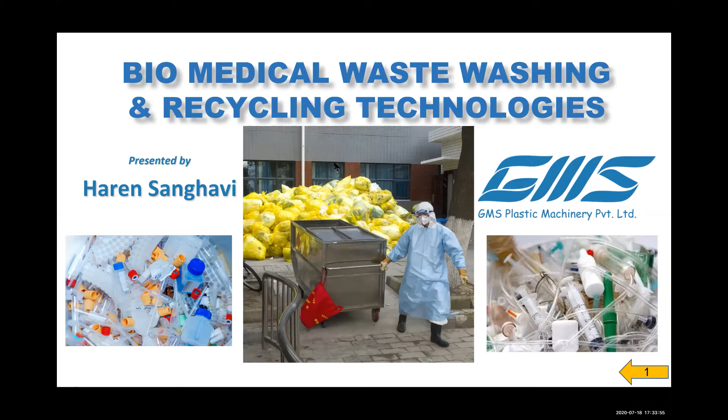And when we are handling packaging, we need to sanitize it. In spite of doing all the sanitization processes, there is some sort of contamination left behind. To handle that contamination, we need, and 100% need, to wash the waste. And to wash the waste, we need either fully automatic washing plants or semi-automatic washing plants.

Now, the requirements for the type of semi-automatic or fully automatic washing plant differ from each client and the output required by each of them. So I will stress here the major requirements, then the minor requirements can be decided once we talk to each client and understand the product they want to recycle, the output they require, etc.

The main requirement in the fully automatic washing plant would be the shredder. Then comes the friction washing, which is most important, because at this stage, after the shredder or grinder, we are able to put some detergent with water to remove all the contamination, even in the minutest of particle sizes. Subsequently, in the friction washer, with the help of friction, every corner of that plastic can be cleaned of all the contaminants left behind.

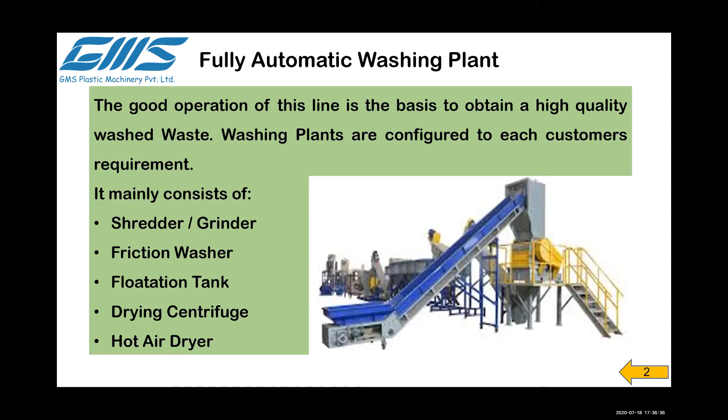After the friction washing, then comes the flotation tank where we settle all the heavy particles and the plastic will float and move further. Then we have the centrifugal dryer and then the hot air blower. This configuration is the basic configuration, but it need not be the same every time. It could vary from client to client, as I said earlier.

In the fully automatic plant, the most important thing is that every single unit is configured for very low power consumption of 0.4 kilowatt per kilo, which is the data we have received from our clients, and we are confident about it. Only one operator and one supervisor are required, depending on the size of the plant, but mostly one operator and one supervisor is enough to run the fully automatic washing plant.

Labor is required only to feed the material at the starting point, and then we have complete automation. We can even link a recycling machine directly after the washing unit so that you get the granules at the end without manual touch. So once you dump the material into the washing plant, you directly receive the granules and you are working very safely.

Floor space required would be close to around 50 feet by 20 feet, depending again on the configuration of the plant. But this is based on the previous slide that I had mentioned.

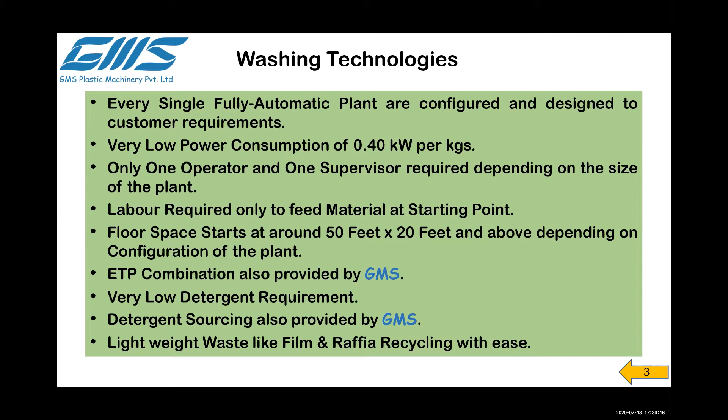Detergent sourcing can also be provided by us. Lightweight waste like film, raffia, of course, is not part of the medical industry unless it is the packaging of the product which has come in. But still, raffia and any other thing related to the medical industry can be recycled and washed easily.

Then we come to the semi-automatic washing plant. Here you can see there is only the friction washing device and the centrifugal drying device. The friction washing device has to be handled and maintained manually, so the detergent dumping and material dumping has to be done manually at every single batch, and this is a batch process.

This is not a process where you can create automation unless you add certain more equipment, which would then be ideal to shift to a fully automatic plant. In this, the requirement of labor would be a little more than in any other washing plant.

Detergent and water requirement would be close to around 10 liters per kilo in both plants, even in the fully automatic or the semi-automatic. After the centrifugal dryer, we can attach a hot air blower so that the material can be dried 100% and fed to the recycling machine fully automatically.

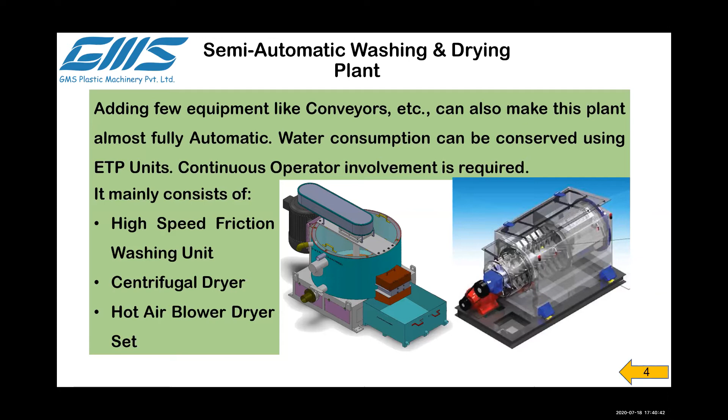In the recycling and pelletizing plant, as you've seen in my presentations earlier, we have two types of recycling plants in this application. One would be for better washed and cleaner material, where we have a single stage extruder with a force feeding device. You can see the feeding system here, then the online screen changer and then the online die face cutter.

Now here you see this equipment. This is part of a venting system where we are able to remove the moisture.

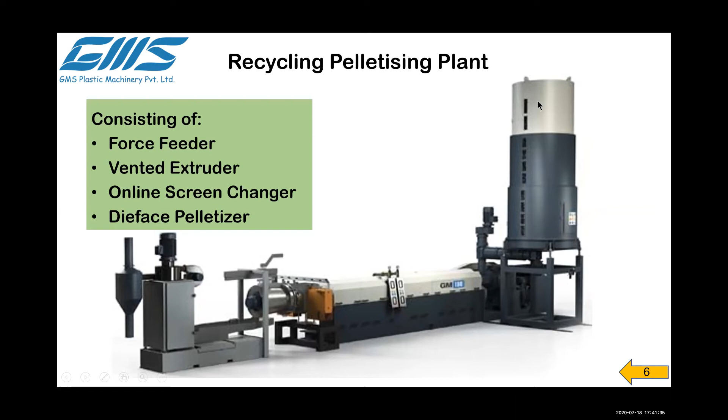After washing, we can directly bring the material here and recycle it with ease. This is a double stage extrusion unit where you should have two extruders if the washing is not done properly. After the force feeding device, you have two extruders. Both could be vented, or vented in between the two extruders, and both could have a screen changer, or either can have a screen changer depending on the dirt quantum. Then we have the die face cutter.

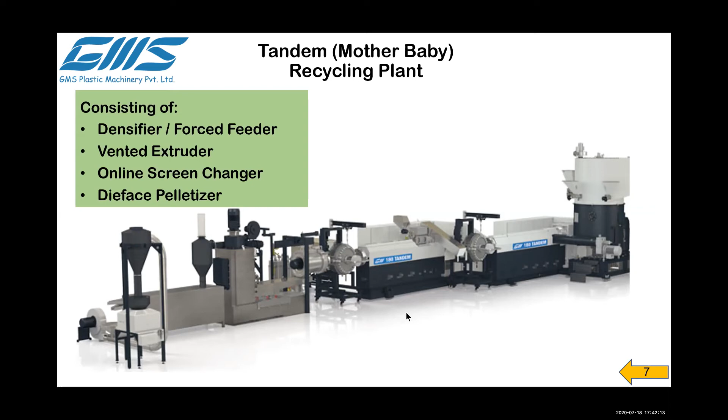Normally, in most medical applications, we would suggest a single stage extruder because they are not very dirty unless they come from dumps.

Now I'll start my presentation on engineering plastics, which is again our very big business and a very demanding business. GMS has developed specialized equipment for recycling engineering plastics, and we are proud to say we are able to recycle almost all types of engineering plastics except those in these particular types of equipment you saw in the earlier slides, except for nylon, PET and PVC.

For nylon and PET, we have a different set of equipment because, for example, in PET we require a lot of pre-drying and after-drying. For PVC, we need air phase cutting instead of water immersed die face cutting.

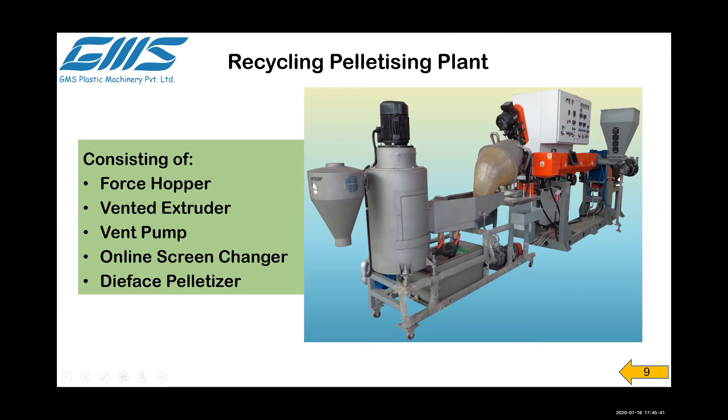The benefits of our recycling machine, the main features are low power consumption, close to around 0.25 to 0.37 kilowatt per kilo. The reason for such low power consumption is direct coupling, hence no slippage of belts, pulleys, or transmission systems. Variable speed is given to each equipment.

Consistent output, as I said earlier, the force feeding makes it consistent. No preheating of material is required. I stress this because in engineering plastics, for example polycarbonate, ABS, PC, the traditional conventional equipment would require preheating, and everyone needed to invest in high-speed mixers, whereas now the requirement of high-speed mixers with our equipment is eliminated. Hence you save a lot of investment, and over and above that, you save also on the power consumption of the high-speed mixer.

Then comes the extruder heating, which is very low, almost every zone is not more than 4 to 5 kilowatt per zone. All motors would be running not above 60% capacity. You can see the power saving at every stage. Of course, over and above this, we have certain equipment which we are also providing with PLCs and Industry 4.0.

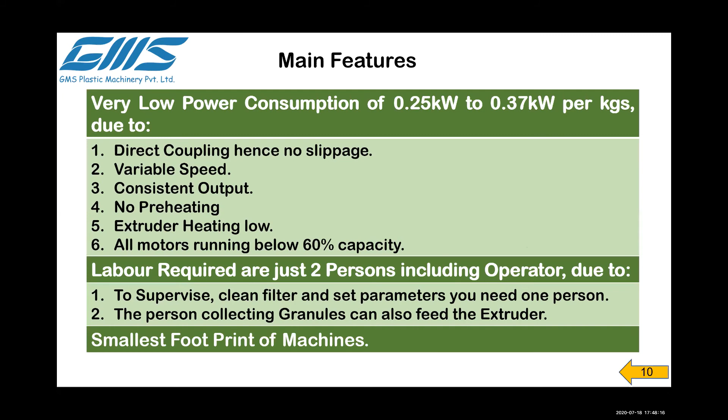The machine, as I said earlier, has the smallest footprint. Again, no mixer required, no pre-drying required, so you save power consumption. You can, without any worry, feed material with about 3% moisture into our machine, because all our machines are vented.

Post-recycling, standard dehumidifier drying would be enough to reuse the material. It will be the same time and temperature to pre-dry the virgin material.

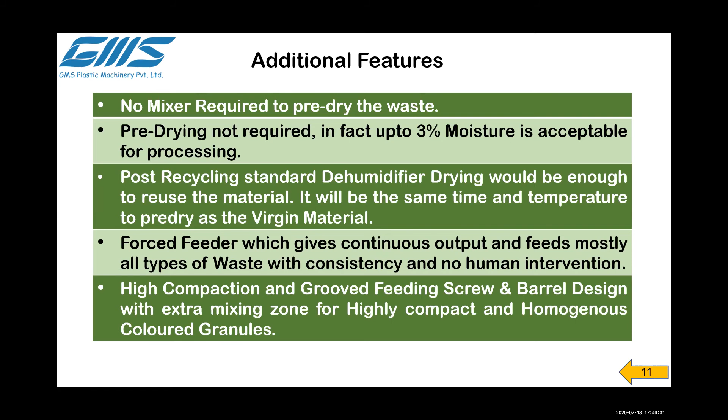Forced feeder gives continuous output and feeds mostly all types of waste with consistency and no human intervention. High compaction and grooved feeding screw and barrel design, with an extra mixing zone, give highly compact and homogeneous colored granules. So if you are just pre-mixing the material with pigments, you can do it in a tumble mixer and dump it in our machine. You don't need a high speed mixer, just a tumble mixer, and you will still get homogeneous granules from our machine.

Then, all our machines are built with a die face cutter, so you get uniform granules. We have all our machines built with oleodynamic online screen changers, so you don't need to stop the machine. This saves production time and minimizes your losses in production.

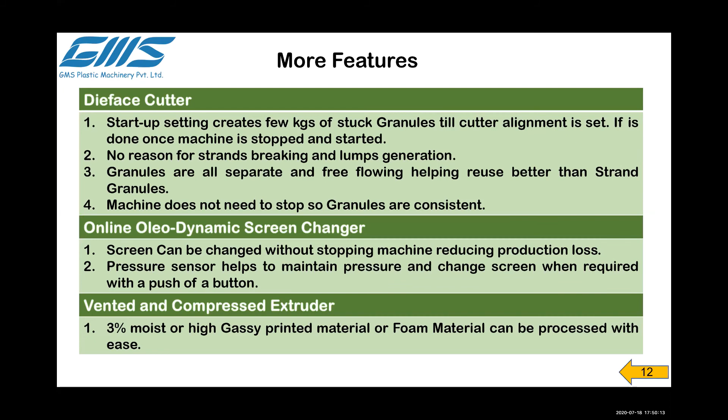There is a pressure transducer on each machine, so whenever the pressure increases, you immediately get an alarm, and with a push of a button, you change the screen. All our machines are vented and compressed, so you can use up to 3% moisture material, and you can even use foam material without fear.

The benefits of GMS: we provide a free trial to every customer. GMS designs each equipment to suit the customer's needs, thereby achieving 100% performance as promised. GMS provides installation at no engineer cost, and GMS provides lifetime service to all our members, all our customers.

GMS supplies machines with only high quality branded components. Most of our components are Siemens, and drives would be Danfoss or ABB. So we just maintain the topmost quality of products.

GMS provides bimetallic screw and barrel where required. If you are having glass-filled material, we would always recommend using a bimetallic screw and barrel. Then GMS supplies required tools and extra spares with every ordered equipment.

GMS, a name you can count on. GMS, a brand for quality and service.